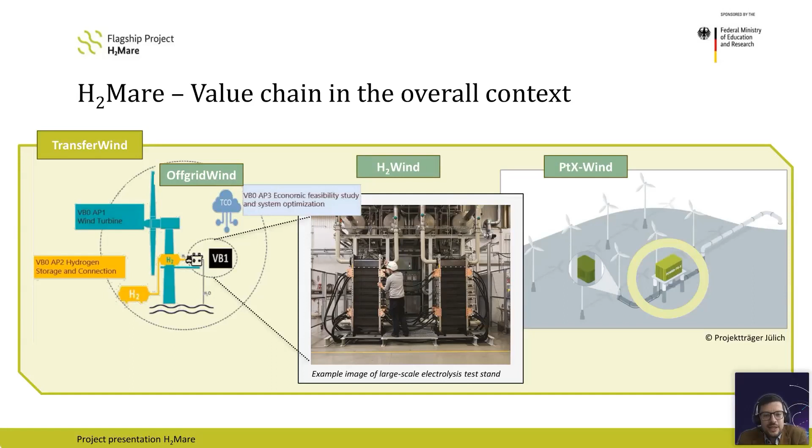The overall linkage is basically done by the project we call Transfer Wind, which focuses on topics less of a technical nature, but more health and safety, environmental topics, stakeholder engagement, educational aspects, regulatory aspects - all the topics that concern all of the other projects together. So that's how we are made up.

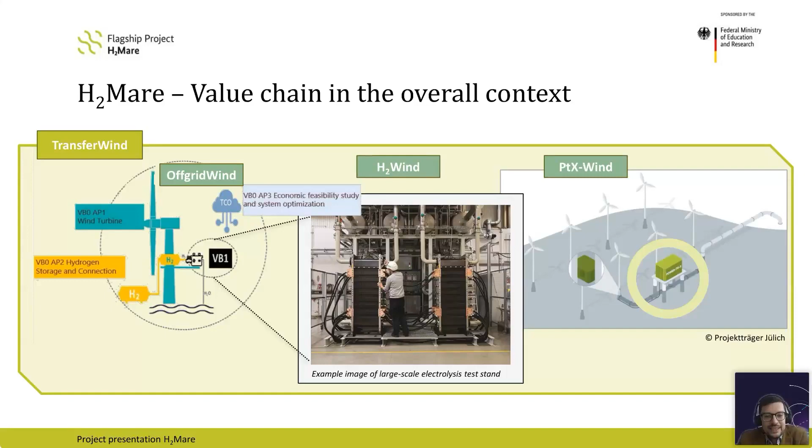And here you can actually see all the different partners - universities, small and medium enterprises, research institutes, but also big players that are involved in H2Mare.

But now actually focusing on where we are, what is happening right now, just to name a couple of highlights. The interesting part that just went into commissioning and is running now is the water treatment. So the real tests that we started up in Bremerhaven to really see which purity levels we can get to, how much issues we have with regards to maintenance, because this will be a crucial topic, and Oliver will touch on this later.

We are in the final installation phase of a 2 megawatt scaled integration test up in Brande in Denmark, where we want to see the interaction of a wind turbine and the electrolyzers - how does this work in reality? Because you can simulate so much, but you really want to see how the real stuff works and what experience you can gain.

At the same time, right now where I'm standing about 50 meters away, we're about to do the final assembly of the first offshore electrolyzer short stack - to really put the electrolyzer or stack design that we looked at for offshore together, and to really start testing those topics.

At the same time at KIT in Karlsruhe, we have the Fischer-Tropsch container that is in its final installation phase for onshore trials, before it will be put on the Power-to-X trial platform for actual offshore trials, which takes me to the next point.

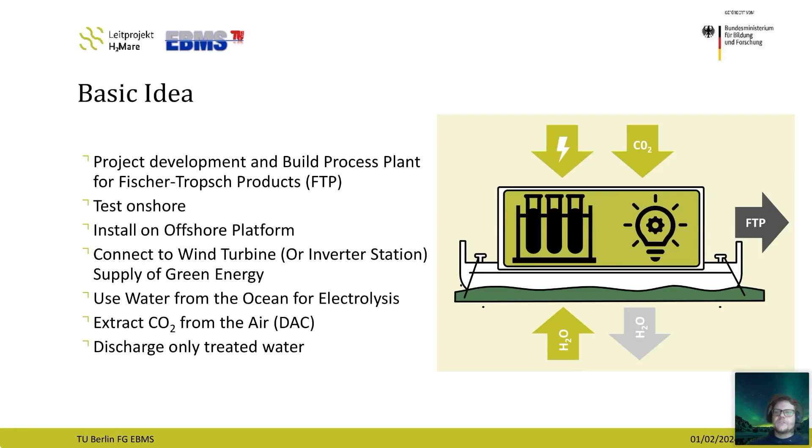What will actually be the scope of the project is, first of all, a twin-fold structure. You have first the Fischer-Tropsch production process plant, which is developed in coordination between KIT and DLR-TT, down in the south of Germany. There will also be an additional direct air capture, like I just said, and a CO2 buffer, and of course the aforementioned water purification and wastewater treatment facilities.

But just a quick note, there won't be any discharge of wastewater into the ocean, before anyone asks afterward - because just for the first trial, we were just analyzing whatever comes out of the process, but there won't be any discharge into the water.

These systems then need to be converted for temporary offshore use. I highlight the term temporary because if you see the actual container on the right side of the slide, this sort of structure to get it offshore certified is a really difficult task. So on the other side, we need to take this into account when we plan the platform itself.

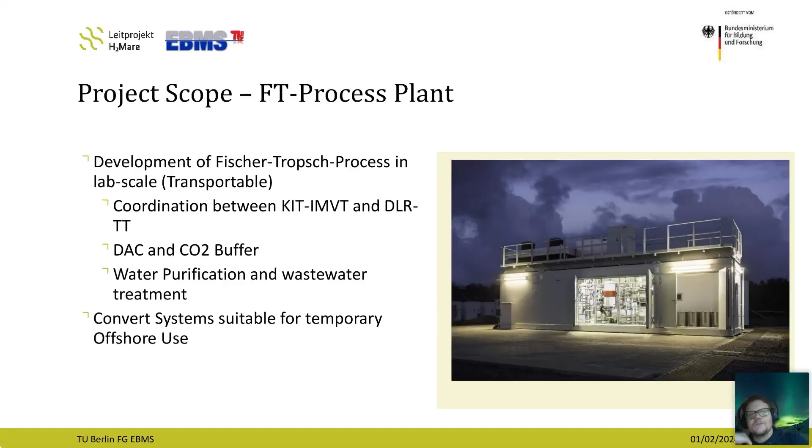You will have a central control station where all the different aspects of the platform will be connected and can be controlled from there. You have different storage and maintenance facilities for quick maintenance and for storage of the produce and products. And of course, all these different containers have to be interconnected, so you have to plan for cables, for pipes, and account for different temperatures and pressures.

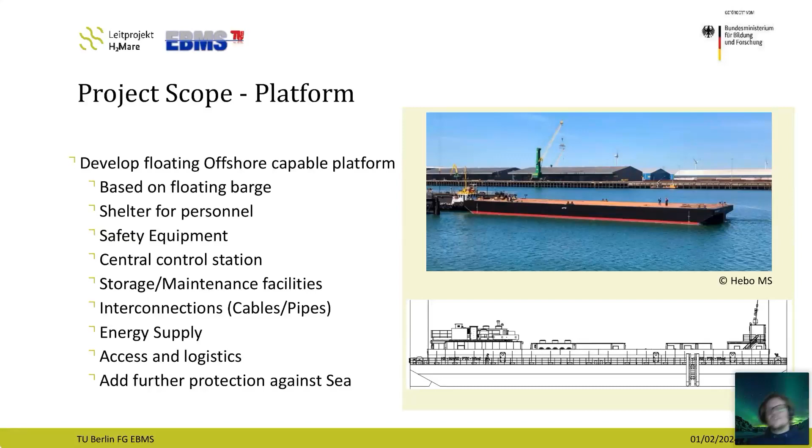Of course, you have to get to and from the platform, so you need to take this into account for accessibility and logistics. And like I said earlier about the different offshore types of containers, they are not 100% watertight or suitable for these conditions. So we have to add further protection against the open sea and against water ingress, because it's a very precious container, and we don't want any damage on these.

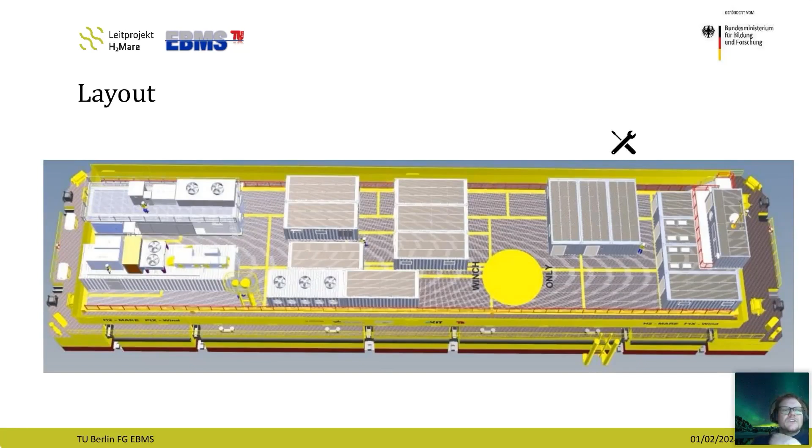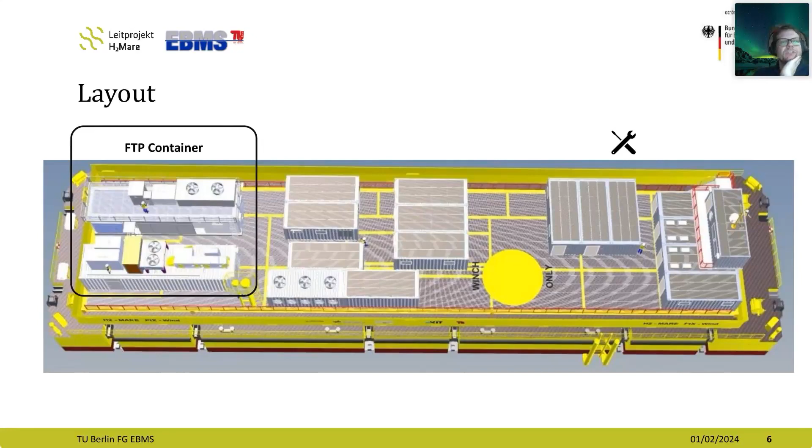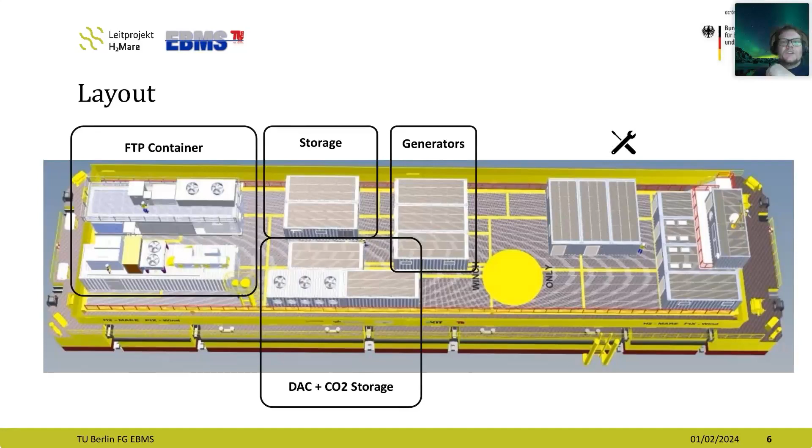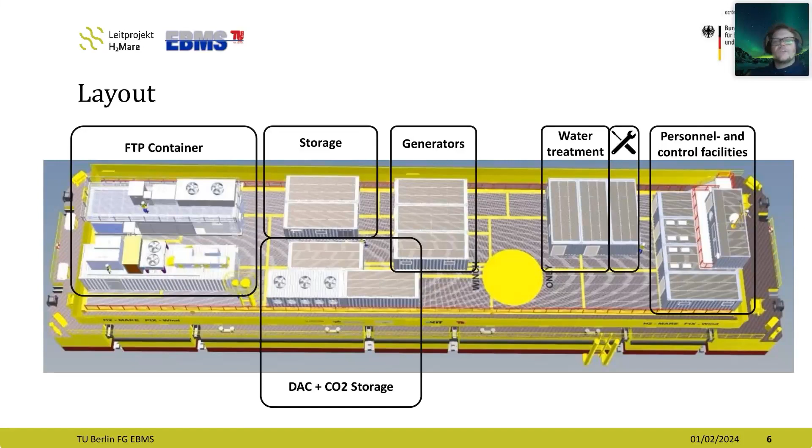Let me quickly talk to you about the actual layout we have chosen. On the left side, we have the Fischer-Tropsch process plant, with two containers in this regard. We have the direct air capture on the bottom. We have several different storage facilities. In the middle, we have the generators, a generator and a backup generator, and storage for that. We have the water treatment, which means freshwater and wastewater treatment. We have a small workshop for maintenance, and all the quarters for the personnel and control facilities. This has all been integrated and interlinked.

On top of that, you have a false floor. All the containers are still raised on the inside, so if any water is getting into the structure, there will be no contact with the containers because they are raised approximately 1 meter from the floor, and all the water can then drain out, and you won't get wet feet when you're working in there. Like I said, no accommodation, because the people work there and then get transported back to land.

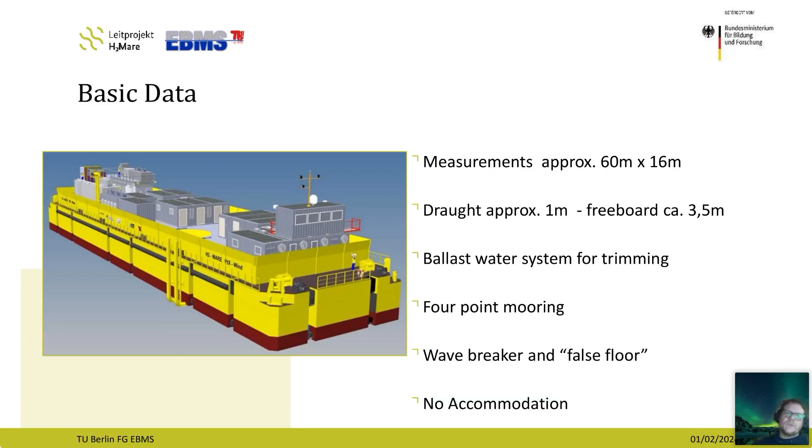What's the action plan? Where would we want to do these experimentations? It's still unclear where exactly we want to build the platform, but our best contenders are three ports or cities in Germany. It depends on the tender where we will actually be building it.

But the first test will be on site or in situ where the platform is actually built, and then there would be some nearshore tests close to the coast. It depends on where we're actually building it, and the big vision is to get the platform out until... why doesn't it work?

Out to Helgoland for the final offshore test close to Helgoland island. Each of these bigger tests, like the nearshore and offshore tests, are planned to be approximately two weeks during the summertime, when it's more likely to have nice and stable weather conditions and not the big winter storms, because it's still a floating structure and it's valuable. You don't want to sink into the North Sea.

What's the timeline? We are now in the beginning of 2024 in the planning and construction phase. We are starting the tender phase, and until the end of the year there will be the start of manufacturing for all the different platform components. In the beginning of next year there will be assembly and commissioning. The first tests will start as soon as the weather is suitable in springtime, and after that we will do the nearshore and offshore tests before it is sadly disassembled at the end of 2025, before the project ends.

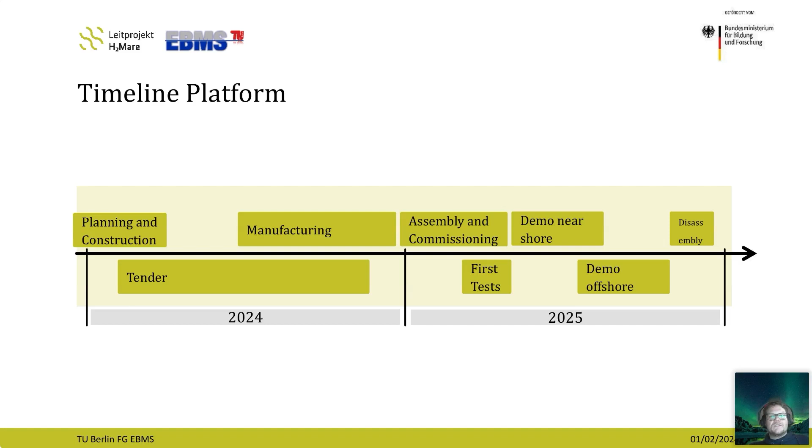Learnings and conclusions. What have we learned so far, and what will come in the future? It was quite a steep learning curve to consider all the laws, rules, and regulations surrounding this topic. Like I said at the beginning of the presentation, it's an ongoing process. We're still learning, but anyone who will ever do this kind of project in your country, please take into account all the rules in place, because it plays a big role. You can have the biggest ideas, but if it's not suitable for realization, then it just falls short.

You should always have an open-minded approach to problem solving. Use the simplest solution you can. In most cases it makes life a lot easier.

You have different regulatory problems you have to overcome in different aspects, and you need to prepare for this. It's always important to talk to people from different backgrounds to get the best information and the best solutions to problems. And of course, the whole thing is a start for something much bigger. There are bigger and more elaborate structures and plans in the future. So this is the first step on a long-term plan, and we can't wait to continue the process.

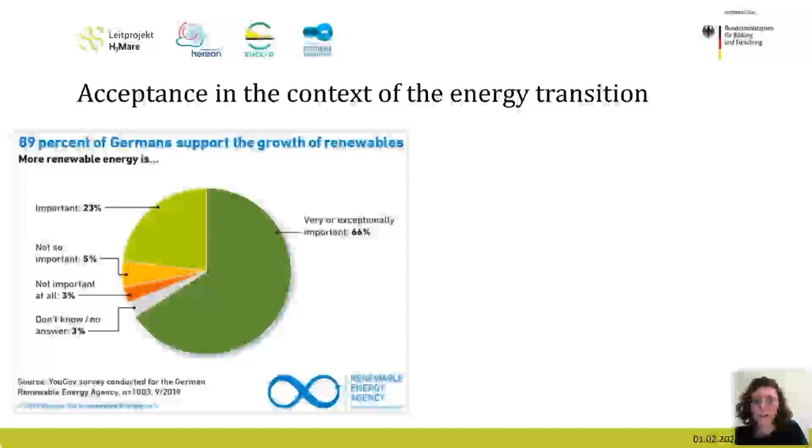Okay, so let's see what the Germans actually did say. In this survey among the population, we find that, very close to what you thought it would be, almost 90% of the Germans think that more renewable energy is very important or important. So there is a high support for the energy transition.

However, asking these very same people to what extent they would support such a facility in their direct surrounding, in their backyard or neighborhood, we see that support drops to only 64%. So it is higher than you thought, luckily, and it's also much higher than in the case of coal or nuclear plants.

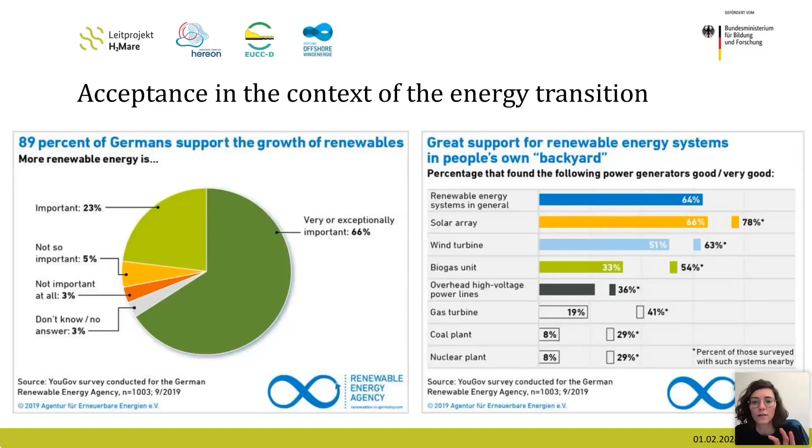Interestingly, if people already had experience with such facilities in their neighborhood, their support is higher than those who do not have any experience so far. So you see already that depending on the questions you ask and the angle you look at it, acceptance can change very much.

And in acceptance research, we distinguish between three different types of acceptance. This is, on the one hand, socio-political acceptance, what we just talked about, the very general public attitude towards the energy transition. Then the market acceptance, which refers more to the investors, producers and users of an energy carrier. And lastly, we have the community or local acceptance. This is where we have less acceptance than you thought, luckily, but still this is where most of the conflicts actually arise.

Such conflicts, missing acceptance, can even lead to resistance, and projects cannot be realized. Probably all of you know similar examples from your hometown, from your home countries. In Germany, for example, we have a lot of citizen initiatives against wind energy. If they form protest, it can even lead to such projects having to be stopped, cannot be realized, onshore wind farms for example.

But also looking more at the socio-political acceptance, like in the case of carbon capture and storage. Here, 10 years ago, discussions arose, now rising again. This new technology could not be tested and laws could not be passed because of missing acceptance and a lot of resistance from the public, but also by stakeholders.

Now, the topic of hydrogen is still quite new, so here we still don't know yet to what extent the public does accept it. In surveys that have been done, we see that it is actually seen quite positively. People know about hydrogen and they think it's an important part of the energy transition. However, if they are asked in more detail, we see that many people still have really big knowledge gaps.

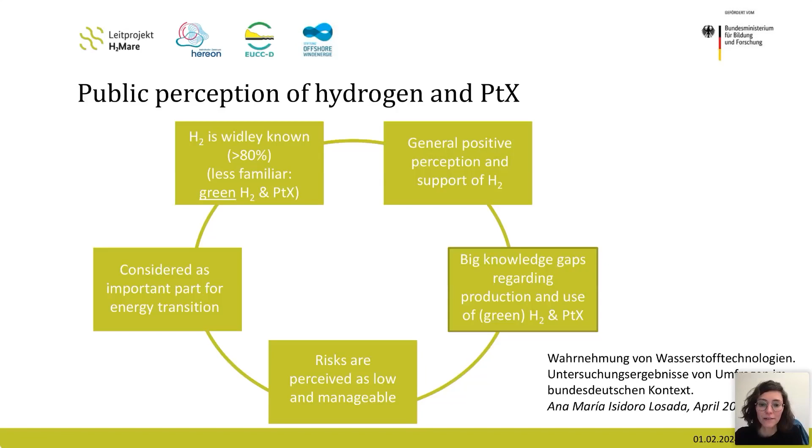But if you think about this, okay, the North Sea should become this big hydrogen power plant, it's not only about putting there some more infrastructure. This whole energy transition must be understood as a whole societal transformation. We have changes in the ecosystem. We also change the infrastructure in the coastal regions, and with this, we change the landscape in these coastal regions.

This might change economies. We have new jobs coming up there. This changes also local identities. And if you really want to realize this whole energy transition, we also need to think about the societal transformation, and we need, for it to be successful, the passive and also active acceptance by stakeholders, but also by the public.

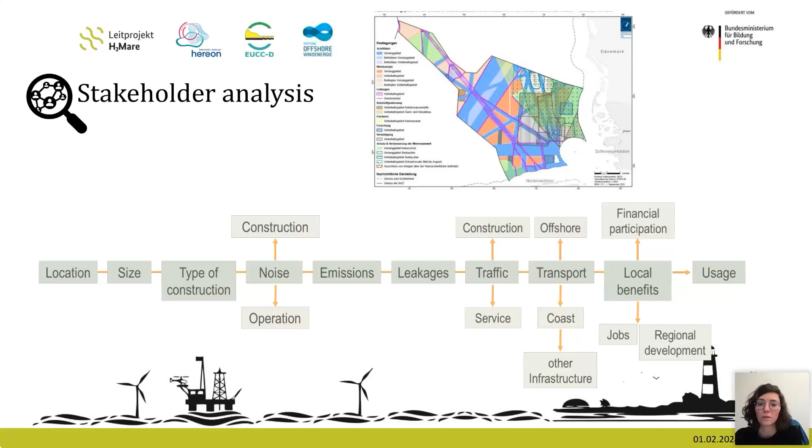Looking at this whole chain, we identified this rough overview of stakeholder groups. We talk about wind farm operators in the offshore industry, but also those more affected by these plans, like fishery, shipping, and environmental NGOs that care for marine ecosystems. In the coastal region, there's tourism and communities that might be affected by new infrastructure. We have ports or regional development agencies that see big new development in such industries, and administration ministries that set the scene for this future technology.

In the next step, we wanted to understand the positions and opinions of these different stakeholder groups. We started interviews with representatives of these groups, 33 in total, using the so-called Q methodology. We gave interview partners 30 different statements addressing different aspects of acceptance of offshore hydrogen technologies, and they were asked to allocate them on a sheet to what extent they agree or disagree with these statements.

The goal of these interviews is to identify groups with similar positions, and this analysis is still ongoing. But so far we see that for most of our interview partners, the energy transition and green hydrogen are considered highly important—nobody really questions climate change and the need for new energy carriers. Marine protection is also very important for all interview partners, not only on the agenda of environmental NGOs. The often anticipated missing acceptance due to risk of explosion was not confirmed—everybody thinks we will be able to handle this.

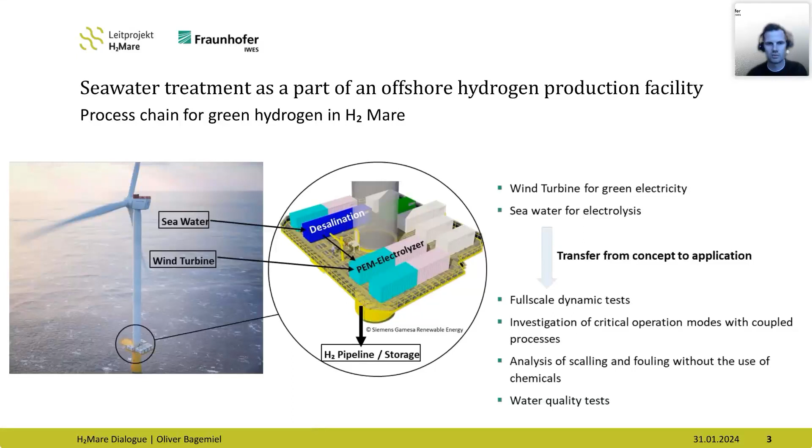Let me start. You can't use any water you get for the electrolyzer directly. For the process, you need ultra pure water. You can't use drinking water, groundwater, or seawater directly. You have to treat the water to make, from groundwater or seawater, pure water so that you can use it for the production of hydrogen. For this you need a unit. In our case, for seawater, it's a desalination unit to filter out all the stuff inside the water which you don't need for the electrolyzer - some like organisms or minerals and so on.

I want to show you this process on the next slides, and I've mentioned here some numbers. You can say for 10 liters of pure water, you'll need between 30 to 100 liters of groundwater or seawater. This amount depends on which kind of system or desalination unit you use. But that's a rough number, so that you have an idea of what amount of water we need for our process.

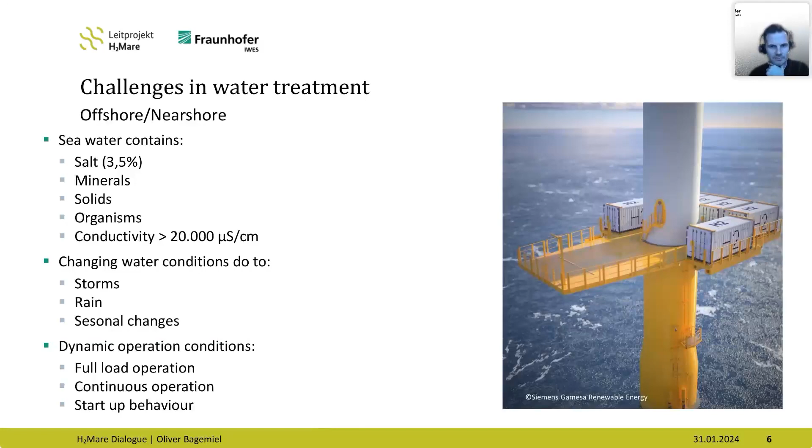It makes it very difficult to build up a constant process for the water treatment. So this we have to keep in mind and face, and this we want to test on the project, and in our test infrastructure in Bremerhaven.

The test infrastructure for hydrogen is still in preparation, and I think it will finish during this year. There we have not only the possibility to test seawater or the seawater treatment, but we can test nearly everything around the topic of hydrogen: the electrolyzer, the fuel cell, power grid connection, wind turbine connection, and storage possibilities. We have a trailer for filling up the hydrogen, and a lot of other topics. Besides research topics, we want to provide our test capacity for the industry, to test different kinds of electrolyzers and so on.

Now I want to come back to the point of seawater treatment. As highlighted here in the white quarter, you can see where we planned our location for the seawater treatment, and this whole test infrastructure is not ready yet. At the moment we only have this big seawater pool with 100,000 liters of seawater, and there we want to build up our test infrastructure.

I have a small sketch here on the right side. Beside our seawater pool and the desalination unit, we have pumps that are needed. We have some filters to filter out some organisms, and we also have the connection to our electrolyzer.

Another topic we want to pay attention to is heat extraction. For the desalination process you need heat, because we have to heat up the water. For this we want to use the process heat from the electrolyzer to make the whole process more efficient. What's important to say is that here we have a closed process, I would think, so we would process here in a circle.

Our main thing is that we want to treat the water, and we have different water tubes which go back to our seawater pool. At every tube we have the possibility to take some water probes and check the quality under different conditions we are driving there.

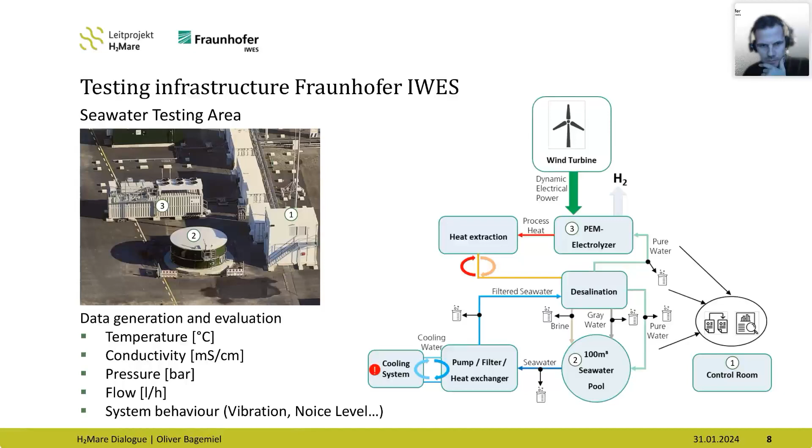Why are we testing? The reason why we are testing at scale is that we want to find out the output of pure water and what we have to put in in terms of energy, and how much seawater we need to produce 1 liter of ultra pure water. We want to find this out under different kinds of perspectives.

One perspective is the reliability of the desalination unit. We want to identify the maintenance effort. We want to identify the vulnerabilities of the whole unit.

We also want to find out how the reproducibility, so we can make sure a consistent water quality during the whole process, during the changing process parameters, and also, do we have a consistent production quantity of the water we produce?

And this we want to test under dynamic process conditions, because the seawater temperature changes, the conductivity of the water changes, and the process heat we need for the desalination unit also changes. All this we want to build up on our big test scale in Bremerhaven.

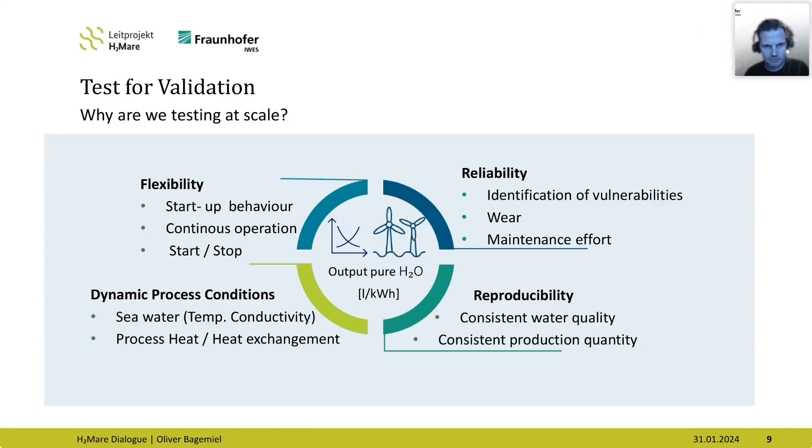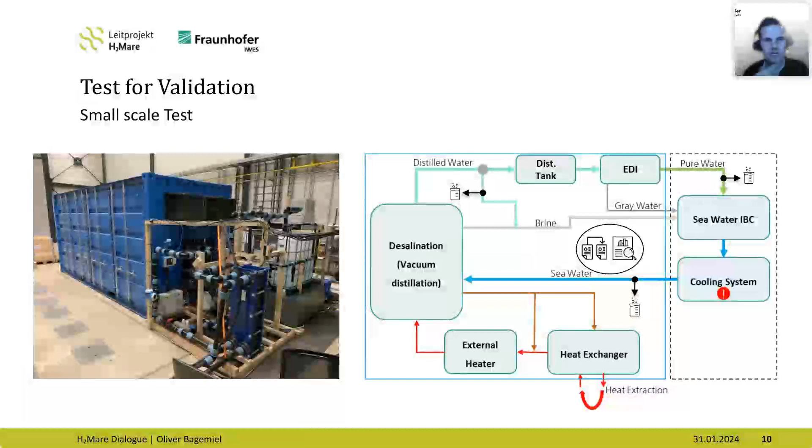But as I mentioned, our test infrastructure on the big test field is not ready yet, but we did some small tests now in another facility.

You can see here in the blue container, we have a desalination unit. We decided to use a vacuum distillation unit because in the project preview, we had the opinion that this type of unit is more useful for the dynamic modes we want to test, or that we have on wind turbines, so that was the reason why we picked this type of desalination for our project.

For first tests, we built up a small scale test. So we don't have a big 100,000 liter seawater pool. At the moment we use a water IBC with 800 liters of water with synthetic salt concentration.

And there we also process and cycle, so every filtered component goes back to the seawater IBC. And so we also need a cooling system, like I mentioned before.

But on every water tube, we have some valves to pick up and take some water samples and check the quality. And we also generate data there, because we have temperature sensors, conductivity sensors, and so on the tubes. So we also collect a lot of data, like we planned for the big scale test.

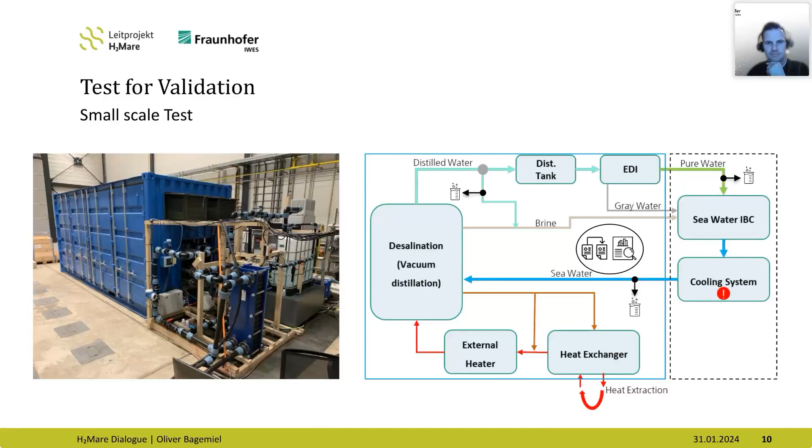What we want to find out, or what we're finding out at the moment, is that we drive the desalination unit with different temperatures between 40 and 60 degrees. And we did some tests with seawater temperature between 2 and 20 degrees. And we had some long and some short run operation modes.

We run the system to get a feeling for how is the behavior. How long does it take for the unit to start producing the ultra pure water? And what we find out is that...

We still evaluate the data we collected during the tests, but we see that we have a small impact on the delivery rate depending on the temperature of the heater. So we have between 250 and 280 liters per hour of pure water we produce at the moment.

And we find that we have a different amount of process time to start depending on the temperatures. So when we have a low temperature and the system is running, then it's okay. We can produce pure water with the same amount of water we had at a higher temperature.

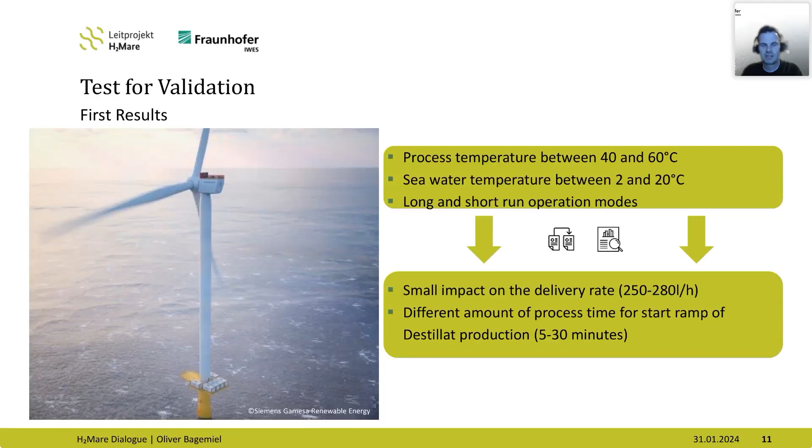That's everything I can tell you about that at the moment. Thanks for your attention, and I'm interested in your questions.

Thank you. Yeah, thank you very much, Oliver. Almost a perfect landing. Just in time to answer some last questions.

Gianluca Carigi is asking, how is the waste heat from electrolyzers used for water treatment? Was it the technology you use for water treatment, or is it reverse osmosis?

No, it's not the technology we use for the water treatment. There we want to use a separate unit, so a separate heating system, heating cycle, to get out the heat temperature or the heat energy from the electrolyzer. Then it goes over to a heat exchanger, where we transfer the heat from the electrolyzer to our normal heating system for the desalination unit. So it's not... let me show the answer.

Gert Devish is asking, what is the ideal water quality in microsiemens value to put a maximum load of the purified seawater with good return? I think the optimum conductivity is 0.05 microsiemens we want to achieve for our pure water. I think I mentioned it on the second or third slide - that the conductivity should be smaller than 0.1 microsiemens, but in our test we had a conductivity level of 0.05 microsiemens.

There's another question by Niusha Alinia. She's asking, are you also considering coupling the SOEC test facility at IWES with offshore hydrogen production? I don't think so, I don't know if there are any ideas to do that. As far as I know, it's not planned.

Martina Nast is asking, which systems will you be testing - reverse osmosis and/or distillation? And what do you think are the biggest obstacles in pure water production offshore? At the moment, in the project, we are not testing reverse osmosis. We are testing a vacuum distillation unit. But our idea is to test, not in the project but beside the project, different types of desalination units, so also some reverse osmosis or a unit which works with reverse osmosis. I think we are in contact with some manufacturers who want to test their units here. So it's planned to test different types, to compare them, to see how they work when we use them in dynamic process modes and so on. At the moment our unit works with a vacuum distillation - we need a temperature between 40 and 60 degrees, and we have a vacuum unit integrated there.